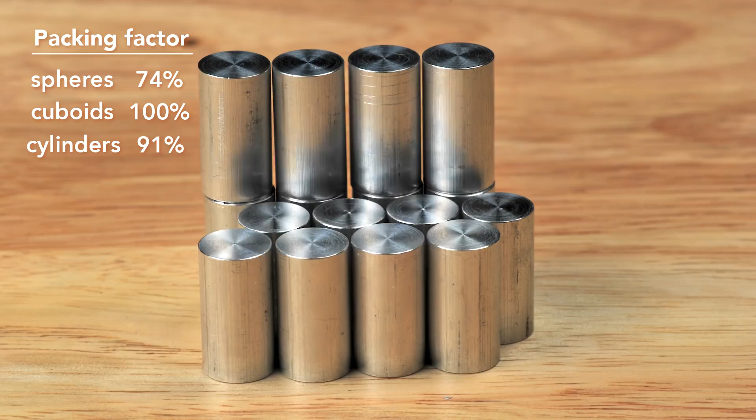From the top, it's like a sphere, and from the side, it's like a cuboid. A cylinder has a maximum packing factor of about 91%, not as good as the cuboid, but better than the sphere. Most important of all, the cylinder can be rapidly manufactured.

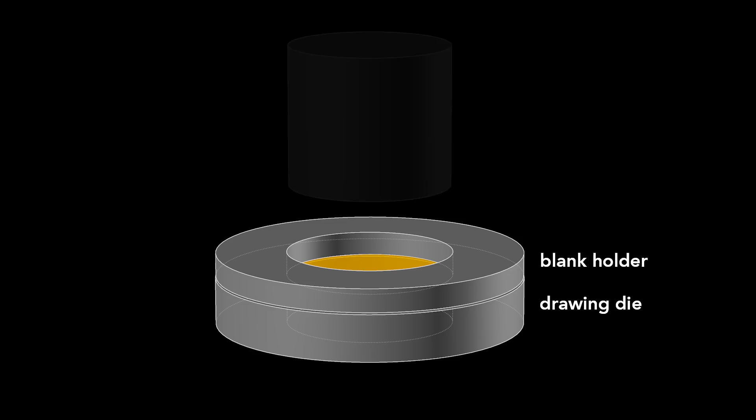The can begins as this disc called a blank, punched from an aluminum sheet about 3/10 of a millimeter thick. The first step starts with a drawing die, on which sits the blank and then a blank holder that rests on top. We'll look at a slice of the die so we can see what's happening. A cylindrical punch presses down on the die, forming the blank into a cup. This process is called drawing.

This cup is about 88 millimeters in diameter, larger than the final can, so it's redrawn. That process starts with this wide cup and uses another cylindrical punch and a redrawing die. The punch presses the cup through the redrawing die and transforms it into a cup with a narrower diameter, which is a bit taller. This redrawn cup is now the final diameter of the can, 65 millimeters, but it's not yet tall enough.

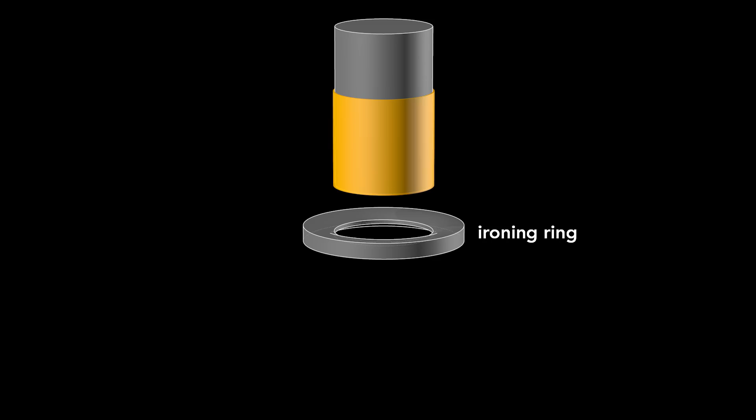A punch pushes this redrawn cup through an ironing ring. The cup stays the same diameter as it becomes taller and the walls thinner. If we watch this process again up close, you see the initial thick wall and then the thinner wall after it's ironed. Ironing occurs in 3 stages, each progressively making the walls thinner and the can taller.

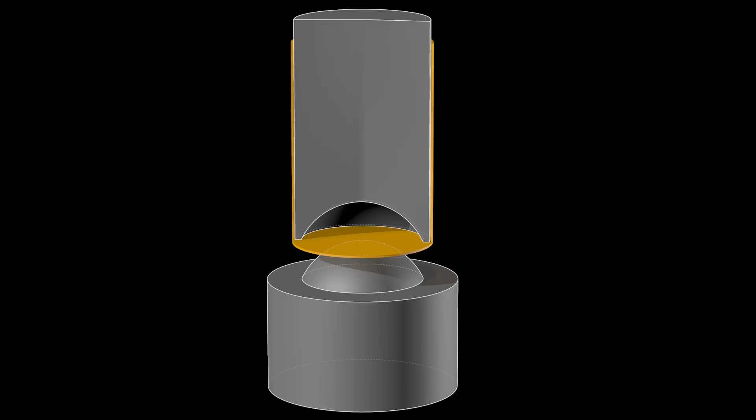After the cup is ironed, the dome on the bottom is formed. This requires a convex doming tool and a punch with a matching concave indentation. As the punch presses the cup downward into the doming tool, the cup bottom then deforms into a dome. That dome reduces the amount of metal needed to manufacture the can. The dome bottom uses less material than if the bottom were flat.

A dome is an arch revolved around its center. The curvature of the arch distributes some of the vertical load into horizontal forces, allowing a dome to withstand greater pressure than a flat beam.

On the dome, you might notice 2 large numbers. These debossed numbers are engraved on the doming tool. The first number signifies the production line in the factory, and the second number signifies the body maker number. The body maker is the machine that performs the redrawing, ironing, and doming processes. These numbers help troubleshoot production problems in the factory. In that factory, the manufacturing of a can takes place at a tremendous rate.

These last 3 steps, redrawing, ironing, and doming, all happen in one continuous stroke and in only 1/7 of a second. The punch moves at a maximum velocity of 11 meters per second and experiences a maximum acceleration of 45 Gs. This process runs continuously for 6 months or around 100 million cycles before the machine needs servicing.

Now, if you look closely at the top of the can body, you see that the edges are wavy and uneven. These irregularities occur during the forming. To get a nice, even edge, about 6 millimeters is trimmed off of the top. With an even top, the can can now be sealed. But before that sealing occurs, a colorful design is printed on the outside. The term of art in the industry is decoration.

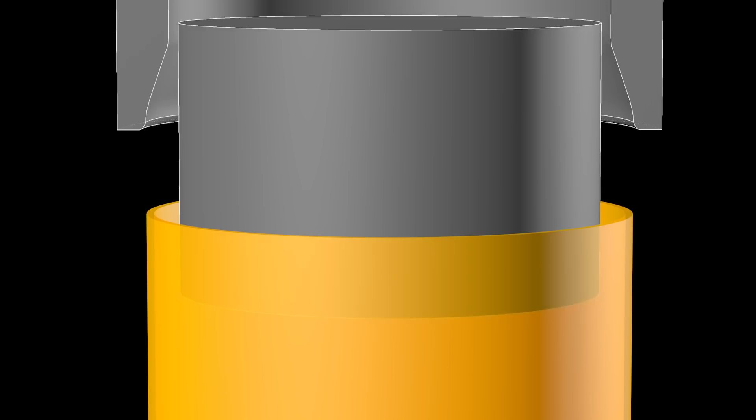Each one of these stages works by inserting an inner die into the can body, then pushing an outer die, called the necking sleeve, around the outside. The necking sleeve retracts, the inner die retracts, and the can moves to the next stage. The necking is drawn out over many different stages to prevent wrinkling or pleating of the thin aluminum.

Since the 1960s, the diameter of the can end has become smaller by 6 millimeters, from 60 millimeters to 54 millimeters today. This seems a tiny amount, but the aluminum can industry produces over 100 billion cans a year, so that 6 millimeter reduction saves at least 90 million kilograms of aluminum annually. That amount would form a solid cube of aluminum 32 meters on a side. Compare that to a 787 Dreamliner with a 60-meter wingspan.

Now, after the neck has been formed, the top is flanged. That is, it flares out slightly and allows the end to be secured to the body, which brings us to the next brilliant design feature, the double seam. On older steel cans, manufacturers welded or soldered on the ends. This often contaminated the can's contents. In contrast, today's cans use a hygienic double seam, which can also be made faster.

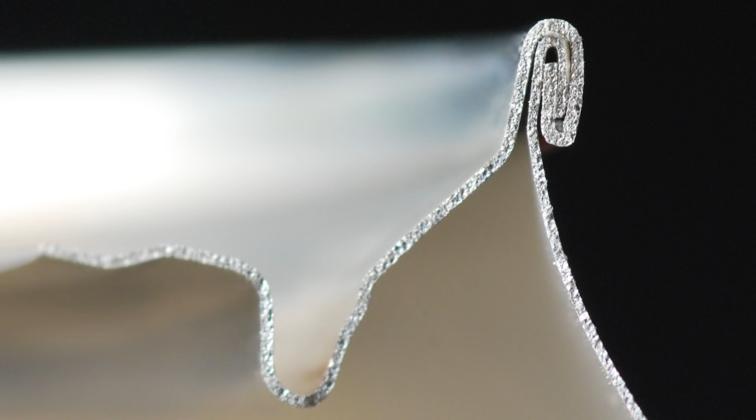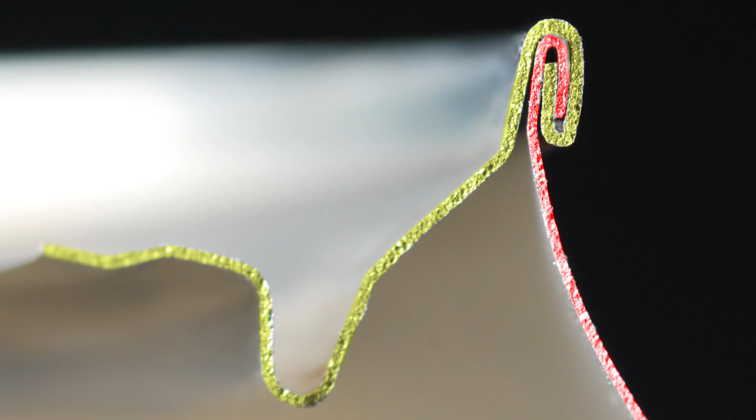This can is cut in half so you can see the cross-section of the double seam. To create this seam, a machine uses two basic operations. The first curls the end of the can cover around the flange of the can body. The second operation presses the folds of the metal together to form an airtight seal. While the operations themselves are simple, they require high precision. Parts misaligned by a small fraction of a millimeter cause the seam to fail.

In addition to the clamping of the end and can body, a sealing compound ensures that no gas escapes through the double seam. The compound is applied as a liquid, then hardens to form a gasket. The end, attached immediately after the can is filled, traps gases inside the can to create pressures of about 30 psi or 2 times atmospheric pressure. In soda, carbon dioxide produces the pressure. In non-carbonated drinks like juices, nitrogen is added.

So why is a beverage can pressurized? Because the internal pressure creates a strong can despite its thin walls. Squeeze a closed, pressurized can, it barely gives. Then, squeeze an empty can. It flexes easily; the can walls are thin, only 75 microns thick, and they're flimsy. But the internal pressure of a sealed can pushes outwards equally and so keeps the wall in tension.

This tension is key. The thin wall acts like a chain. In compression, it has no strength, but in tension, it's very strong. The internal pressure strengthens the cans so that they can be safely stacked. A pressurized can easily supports the weight of an average human adult. It also adds enough strength so that the can doesn't need the corrugations like in this unpressurized steel food can.

While initially pressurized to about 2 atmospheres, a can may experience up to 4 atmospheres of internal pressure in its lifetime due to elevated temperatures, and so the can is designed to withstand up to 6 atmospheres or 90 psi before the dome or the end will buckle.

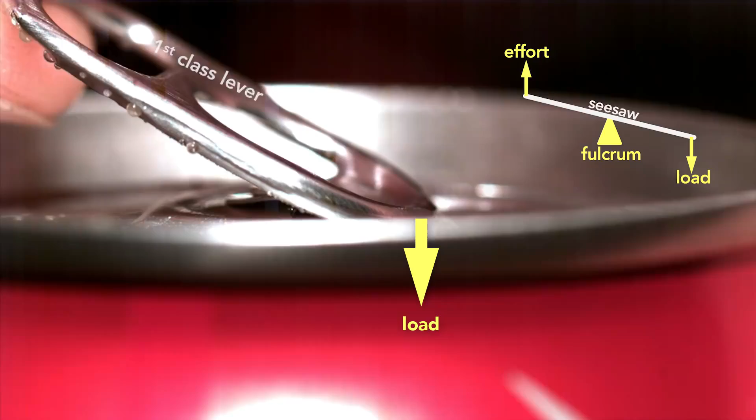But here's the genius part. The moment the can vents, the tab switches to a first-class lever, which is like a seesaw, where the load is now at the tip and the fulcrum is the rivet. You can see clearly how the tab, when working as a wheelbarrow, lifts the rivet.

In fact, part of the reason this clever design works is because the pressure inside the can helps to force the rivet up, which in turn depresses the outer edge of the top until it vents the can, and then the tab changes to a seesaw lever. Looking from the inside of the can, you can see how the tab first opens near the rivet.

If you try to simply force the scored metal section into the can using the tab as a first-class lever with the rivet as the fulcrum throughout, you'd be fighting the pressure inside the can. The tab would be enormous and expensive.

The aluminum beverage can is so ubiquitous that it's easy to take for granted. But the next time you take a sip from one, consider the decades of ingenious design required to create this modern engineering marvel. I'm Bill Hammack, the Engineer Guy.